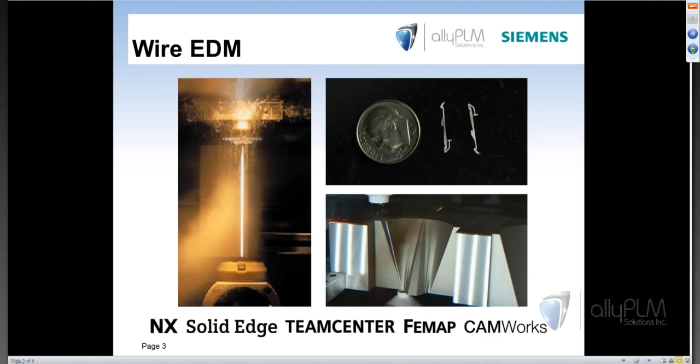So for today's agenda, we're going to look at the no-core operation, two-axis internal trim operation, two-axis external trim operation, two-axis open profile, four-axis internal trim, four-axis external trim, and four-axis open profile.

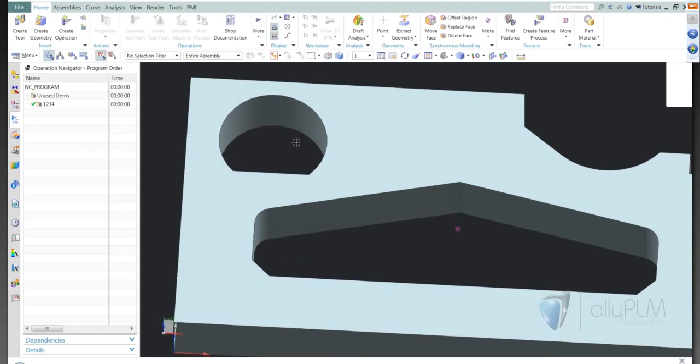Alright, to get started, the first thing we're going to look at is the no-core operation. If you don't want to leave a slug in the middle, you can use the no-core operation. It's going to basically use the wire to burn out the center of the pocket that you're trying to cut. Keep in mind this is only available in two axis. So if you're trying to do a four-axis type part, this operation is not going to be available.

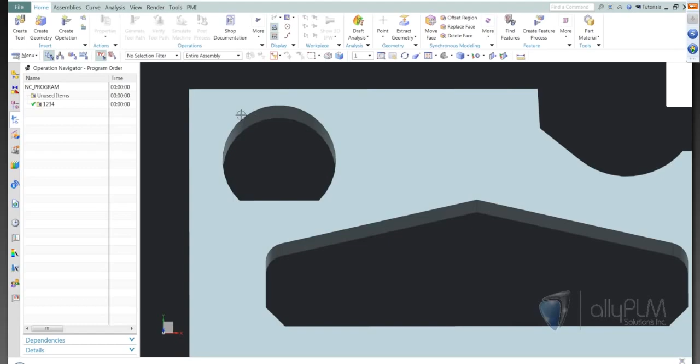So what we're going to do first is this cutout or pocket right here. And again, we're going to use the no-core operation. I'm going to first define the workpiece, and then go ahead and create an operation. Under type, I'm just going to use the wire EDM option.

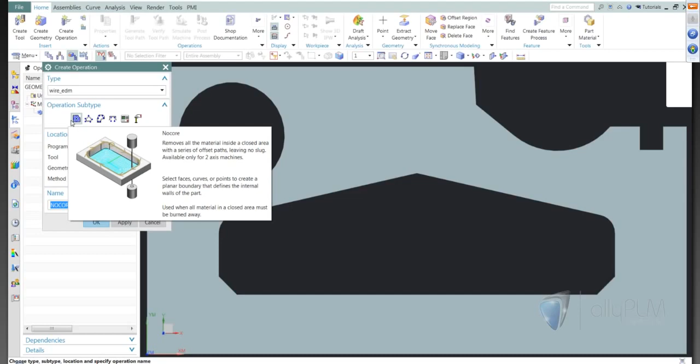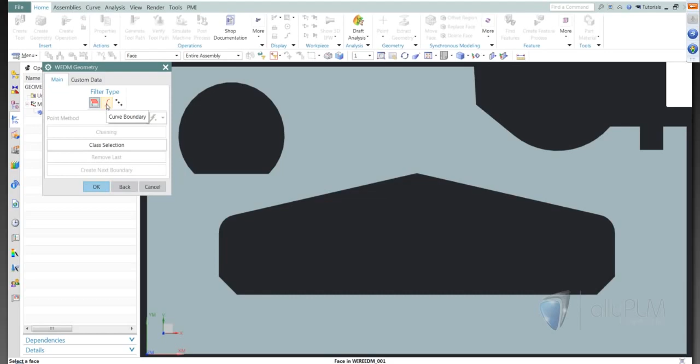So the first option that we're going to look at here is no core, and as you can see there, it removes all the material inside of a closed area with a series of offset paths, leaving no slug. Again, available two-axis only. So the first thing I'm going to do is specify the wire EDM geometry. In this case, I really only have three options for picking geometry: a face, a curve, or a point boundary. For this option, I'm going to use curve, and I'm just going to simply select the curves.

I'm going to go ahead and specify a tool. I'm going to use a 0.5 tool for the demonstration today, just so that you can see it a little bit on the screen. Alright, we're going to accept most of the defaults here and then take a look at some of the details as we go. We're going to leave the default follow periphery, and we'll go into the cutting parameters.

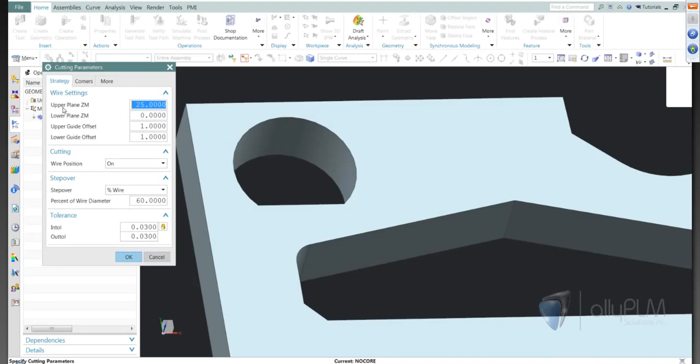Notice we have an upper and a lower plane. We need to set the upper and lower plane based on the thickness of the part. I'll go ahead and measure the thickness of this part. It is 30 millimeters, so my upper plane needs to be set at 30 millimeters. Our upper and lower guide offsets are set to a millimeter. We'll leave that, that's fine. And then we have a wire position on or tangent to. I'm going to go ahead and use tangent to.

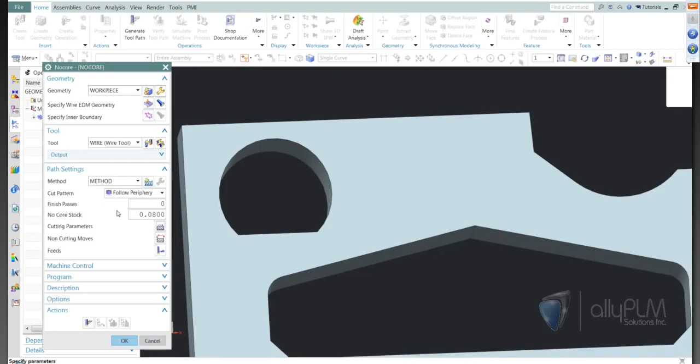Now our step over value is set to a percentage of the wire diameter, 60% of the wire diameter in this case. We'll go ahead and leave that and then accept the default tolerance settings. All right, so the first thing we need to look at is the follow periphery option. It starts in the middle and works its way out towards the outer perimeter of the feature.

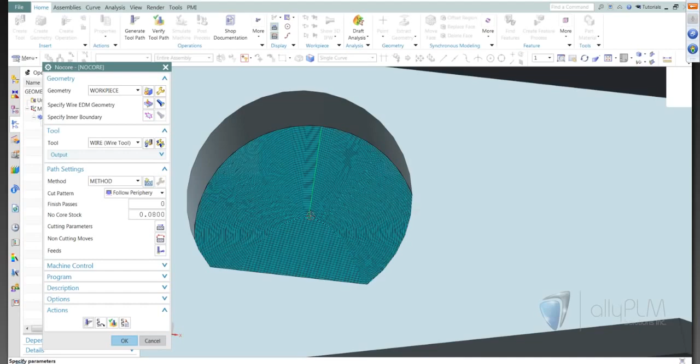Now, one thing that we didn't tell it is where the start location is. It automatically just picked a start location. What we can do is specify the start location. I can go back into the boundary, use control points, and specify our thread hole location. So I'm going to go ahead and specify that at the center and go ahead and generate. So now it is specified directly in the center of this arc.

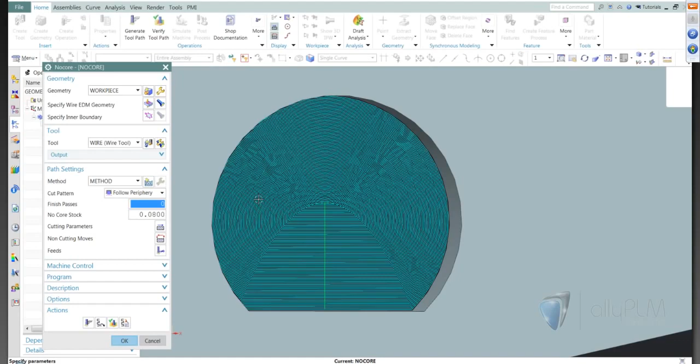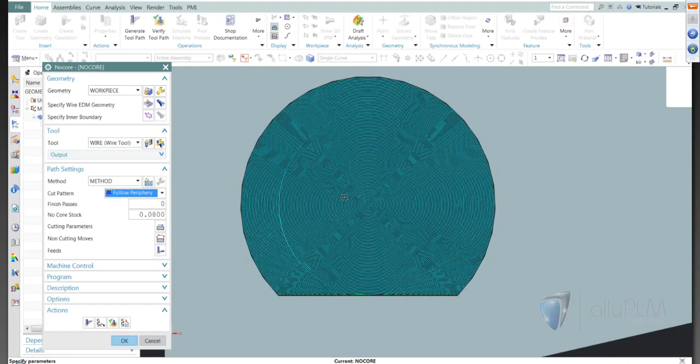The other thing that we should look at is the spiral option under cut pattern. I'm going to go ahead and change this and show you what it looks like. It starts at the center and then spirals outward. Now the only thing about this in this situation is we have these kind of jagged edges there, so that may not be desired. So you may want to use follow periphery in an example like this.

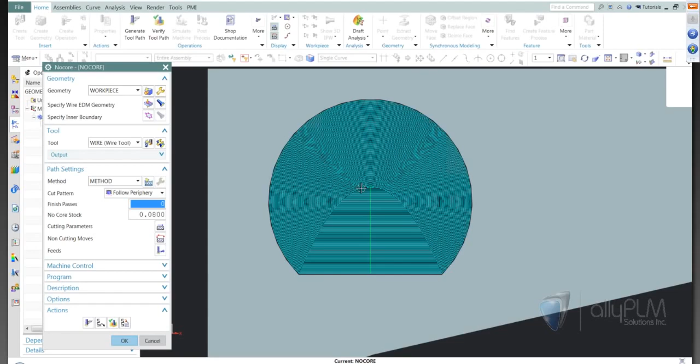And then the next thing that we can do is specify inner boundary. For example, maybe we already have a hole in here, like a starter hole. We don't want to waste all the time to cut out those little step overs with this little wire. So we can define that inner boundary. So to define the inner boundary, I'm going to actually just insert a curve, basically a circle curve.

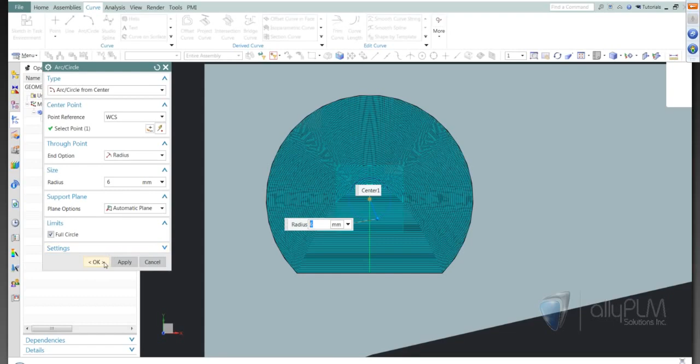So I'll just draw a curve at the center point, and give it a radius of about 6 millimeters. So now we see our curve. Now I'll just go back into the operation. And again, I can specify inner boundary, and then just simply select the circle and generate that.

Now we're still starting from the center, but we are starting from the center of the hole, and then we're removing all of that extra cutting to save you a little bit of time there. All right, the next option that we're going to look at is the internal trim. And this part is all 2-axis. You can see there's no taper or anything on this part, so everything that we're going to do on this part is 2-axis. So we're going to use the 2-axis internal trim for this pocket here.

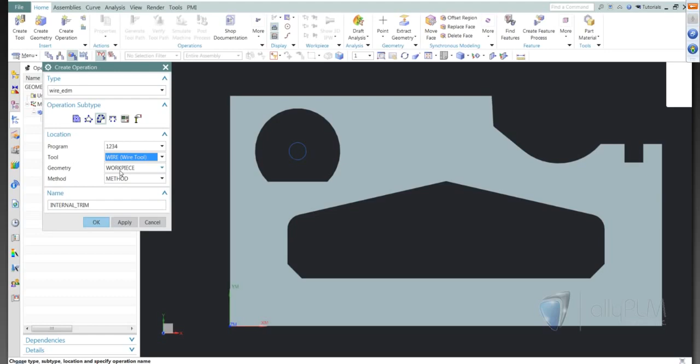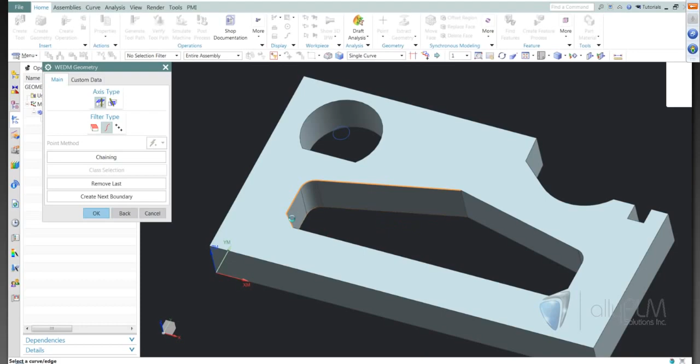Go ahead and create an operation and use internal trim. I can go ahead and use the same tool that I used on the previous operation. Now I'm going to specify wire geometry. Since we're doing 2-axis, the options for picking geometry are the same. So I'm going to go ahead and use curve. Now I can pick each of these curves individually. Wouldn't take too long in this part, but you can imagine if you have a part that's got multiple curves that you would have to pick, it may take a while. So I would suggest using chaining.

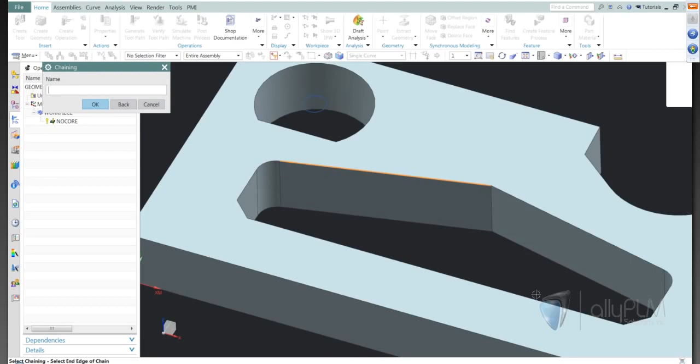So I'm going to turn on chaining, and if you haven't used chaining before, I'll go ahead and describe how this works. For chaining, it depends on which side of the edge that you pick on. For example, if I pick on this left side of the line, that's the way the chaining operation is going to go. If I were to pick on the right side, the chaining operation is going to go around this way. So I'm going to pick on the left side of the line, and then NX is going to basically follow all the way around to wherever I pick next. So I'll just simply pick here, and then it chains all the way around for me. So again, it matters on which side of the line you pick on. So that looks good.

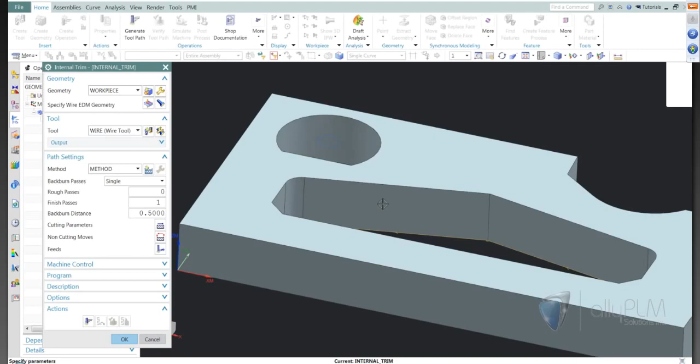Now for now, I'm going to set the rough passes to 0. We're not going to take any rough passes, and we're just going to do one finish pass on this part. We'll look at backburn distance here in just a minute. In cutting parameters, again, we need to set the upper plane, which was 30. Upper and lower guide is 1 millimeter, that's fine. We're going to do alternate directions, and actually, since we're just doing one finish pass, this won't matter. So we could either do clockwise or counterclockwise. So you can select these, especially when you're doing roughing passes, and determine which way you want your cut direction. In this case, it actually doesn't really matter.

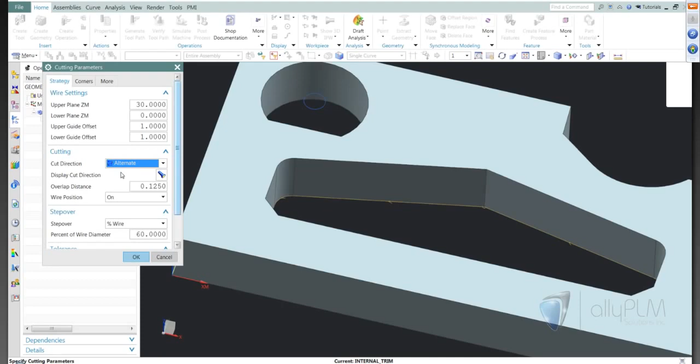So now overlap distance. When this wire cuts all the way around this outer shape, if it starts and stops in the exact same location, you have a chance of leaving like a little edge or a piece of material sticking out. So we can set an overlap distance. I'm going to go ahead and set that at about 3 millimeters, and then we'll take a look at it after this generates. We're going to do wire position tangent to, and step over shouldn't matter in this case either. We'll go ahead and generate this operation.

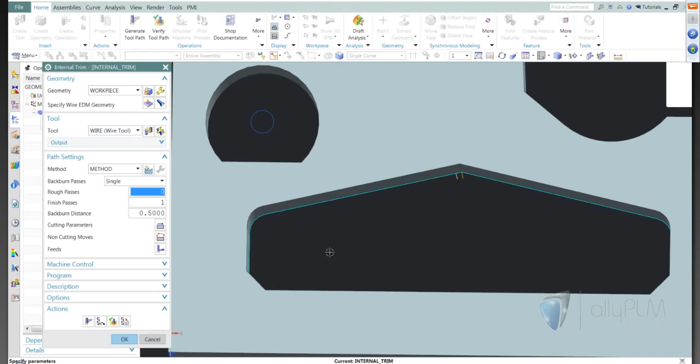Now notice NX automatically just picks the start location or the lead in and lead out points, and it happens to pick right here. That may be fine, but if you want to set it at a certain location, you can still do that as well. Notice the gap between here. One is the lead in, one is the lead out, and the gap between is the overlap distance. So we'll go ahead and take a look at this in verification. Notice it's leading in here, and then it works its way around the part.

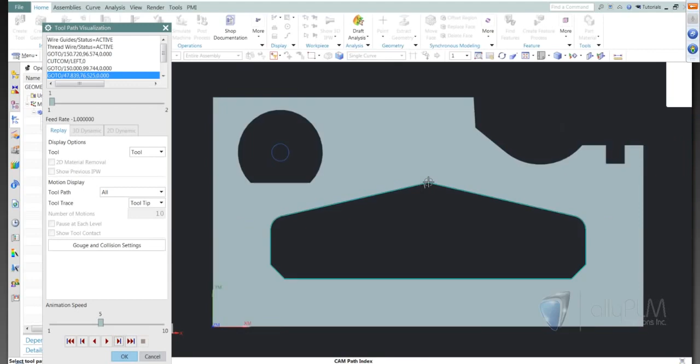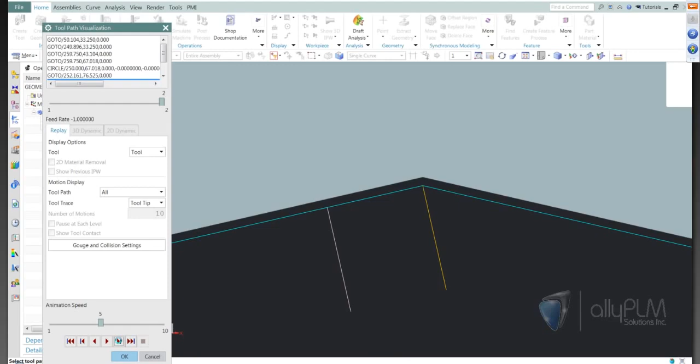Gets back to here, and again overlaps so that you don't have that extra piece of material left when you're done, and then does its lead out. So now we're going to look at doing a lead in over in this corner. So I'll go back into internal trim.

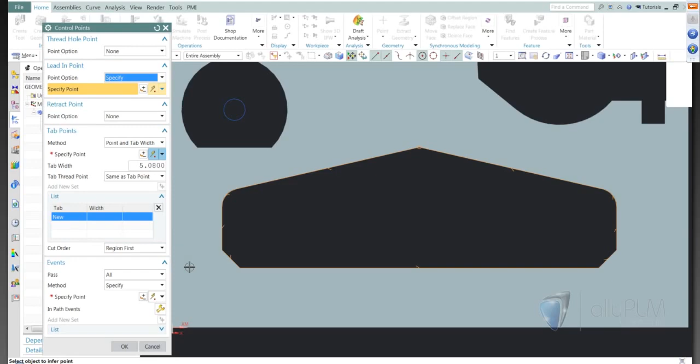To do that, I need to go back into my wire geometry and go to control points. Control points, you have a lot of options here: a thread hole point, lead in point, retract point, tab points. So what we'll do is I'll go ahead and add in just a lead in point for now. So I want my lead in point to be centered on this edge. Go ahead and accept that and generate. So now notice that my lead in is directly centered on this edge.

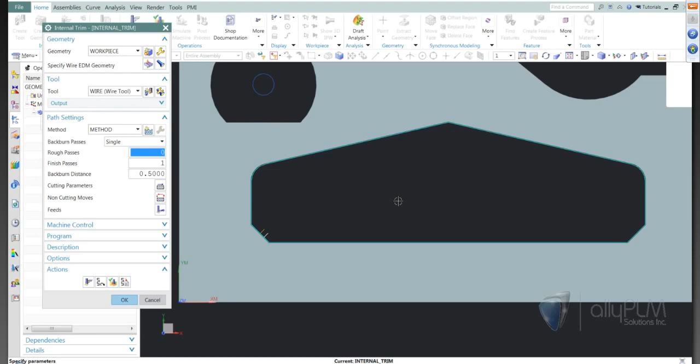Now to specify a start hole location or a thread hole location, we use the same options here in control points, and then we'll just pick a point. So I'm going to use thread hole point, point option. I'm just going to bring up the point dialog and click somewhere close in here. In a real scenario, you would have a hole there, and you'd know the position of that.

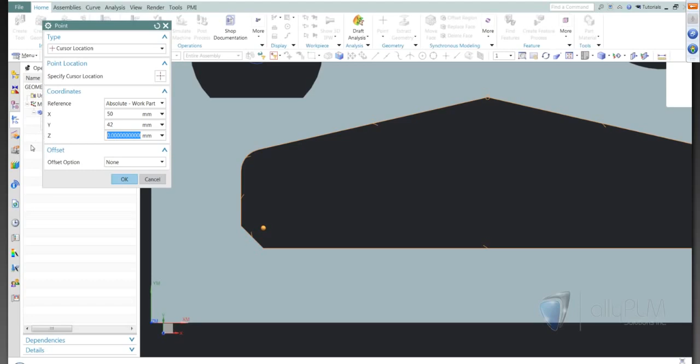So for this example, I'm just going to go ahead and use 50 in X and 42 in Y. And we're going to assume that that block has a hole there for our wire thread location. All right, we'll generate that. So notice it comes from here over to the lead in and then starts the wire cut operation.

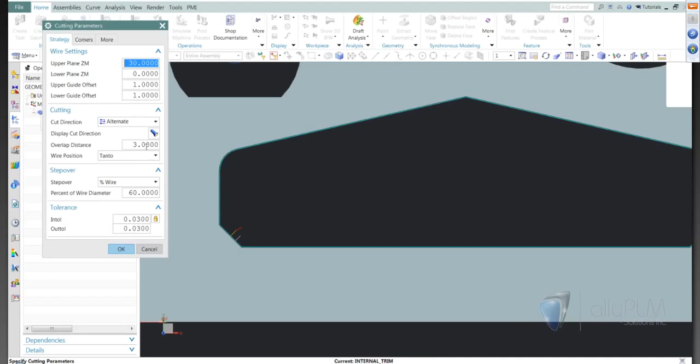I'm going to go back into cutting parameters and change this overlap distance to 0. And why I did that is so that we can see what this backburn distance does. So for example, maybe I want multiple roughing passes on this part, and I want to leave a little tab here basically to hold this slug in place. So if I do multiple rough operations, I'm going to go ahead and put 3 in here.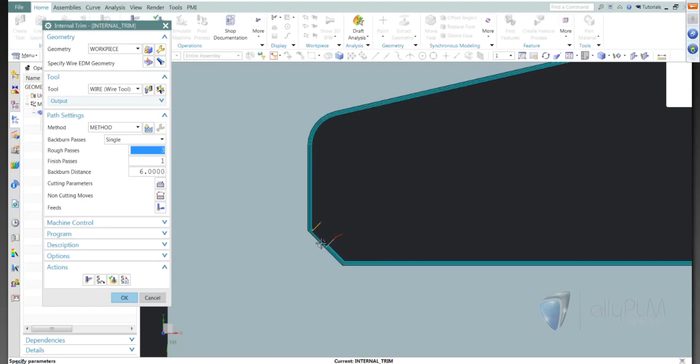My backburn distance is the length of tab that it's going to leave. So I'm going to go ahead and use a millimeter just so we can kind of see it, and then I'm going to change that to a bigger amount, let's say 6 millimeters. So now you can see that it's leaving a tab. So it does its rough cuts, leaving this tab connected, and then when it goes to do the finish cuts, it cuts this tab off.

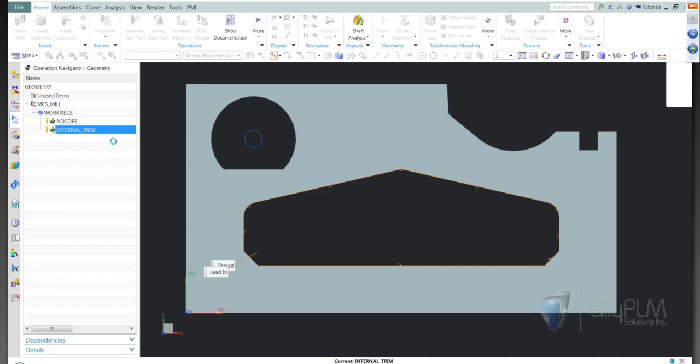We can also add in multiple tab locations. For example, we can have a tab here, and then maybe a tab over here on the right side. We do that by going into control points again and adding in a tab point. The method we're going to use is a point and a tab width. So I'm going to specify a point. I'm going to go ahead and just select the center of this edge. And then the tab width, just to make it match the other side, I'll do 6 millimeters.

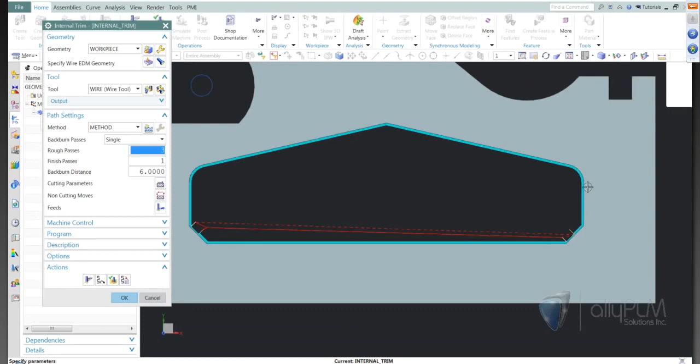And we'll generate that. So now notice we have basically a gap or a tab here on the left side, and then also a tab here on the right side. So again, that's just a way to hold the part in place until the finish cut.

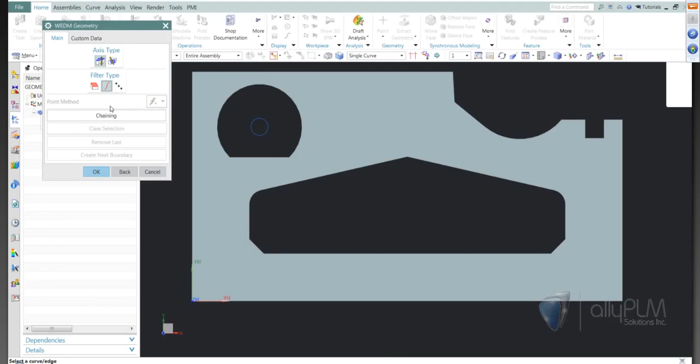All right, so now let's take a look at external trim. We're going to first cut all the way around the outside of this part. Again, this is a 2-axis part, so we use the 2-axis external trim operation. We use the same tool, and we'll go ahead and specify our geometry. Nothing really different here on specifying geometry. I'm going to use chain again, and I'm going to pick the left side of that edge, and NX will chain all the way around there for me.

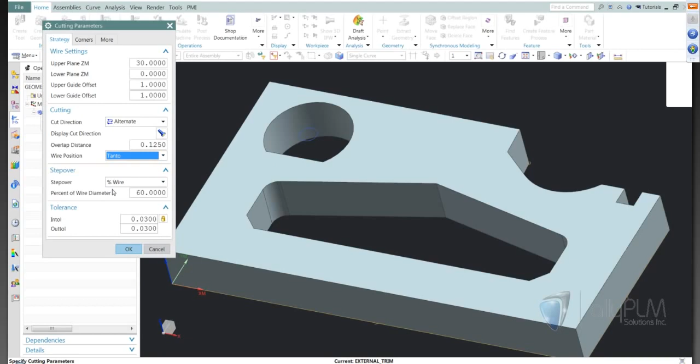And like we did before, I'm going to go ahead and just specify 0 rough passes and 1 finish pass. And we'll need to input this upper plane again. And we'll go ahead and generate. So again, NX automatically picks the lead in and lead out location.

So if we want that to be in a different location, we can do the same thing. It works the same way as internal trim by going to control points and then specifying a lead in point. So maybe we want the lead in over here on this edge, and we'll go ahead and generate that.

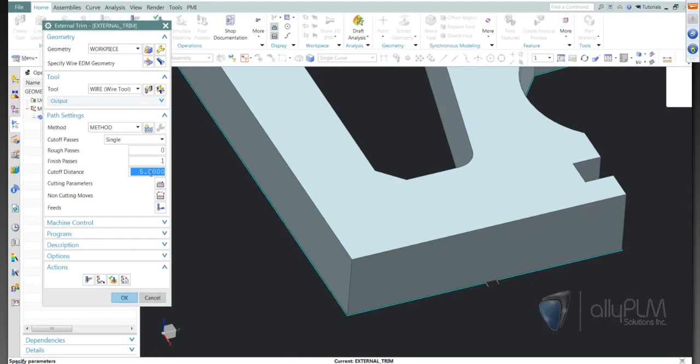Now this also leaves a tab. The default was 5 millimeters. So if we needed to leave an extra amount there, we could type in whatever distance, and it will change that value. If we don't want anything, we can do just 0 here.

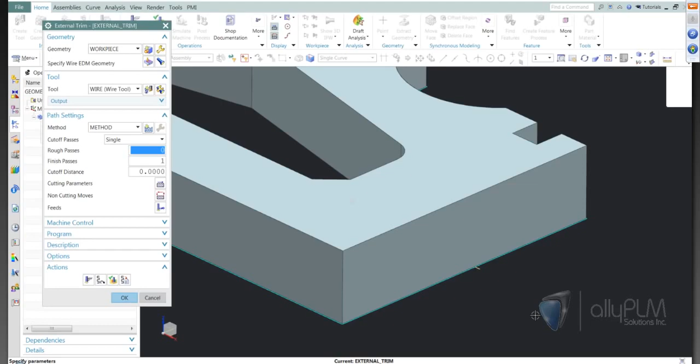There are also a couple other options in non-cutting moves for our engage type. We can select lead in. Notice it's set to direct. We can specify an angular lead in. For example, maybe we want this to come in at a 45-degree angle. So now we're leading in and leading out on a 45-degree angle. The lead out is set to the same as lead in.

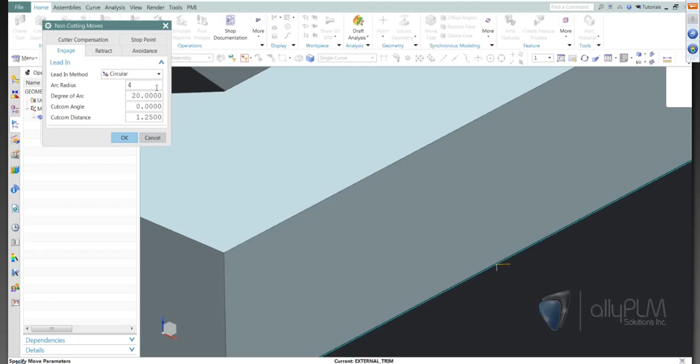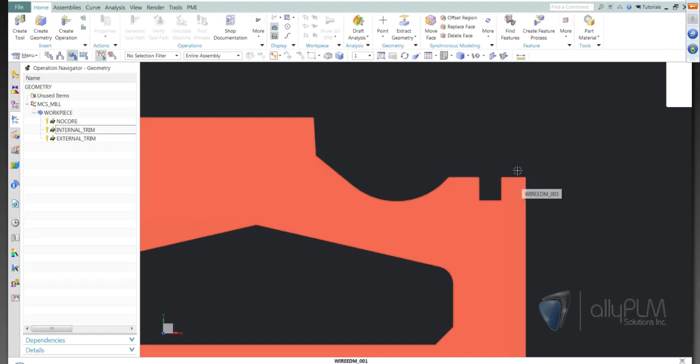And then we also have an option for a circular lead in as well. So we'll do an arc radius of, let's say, 4 millimeters. So now we have an arc coming in. All right, now we'll take a look at the open profile option. So for example, maybe the outside of this block is already cut, and all we need to do is do this cutout shape here. We'll use the open profile for that.

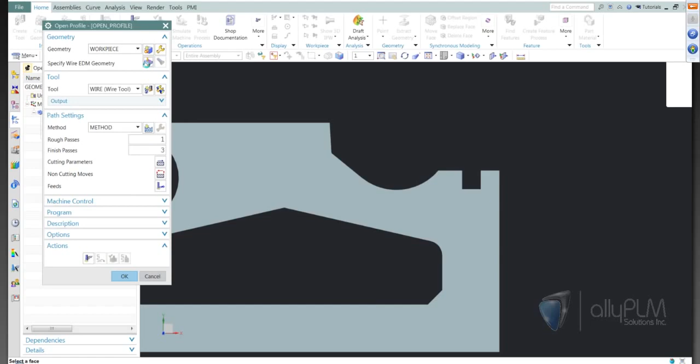So I'll create an operation, open profile, and we'll go ahead and select our geometry. This is 2-axis as well. And I'll use chaining again. So I'll pick the right side of this edge, and I want it to finish up over here. Okay, so the start and then the finish. And I'll leave rough passes and finish passes at the default.

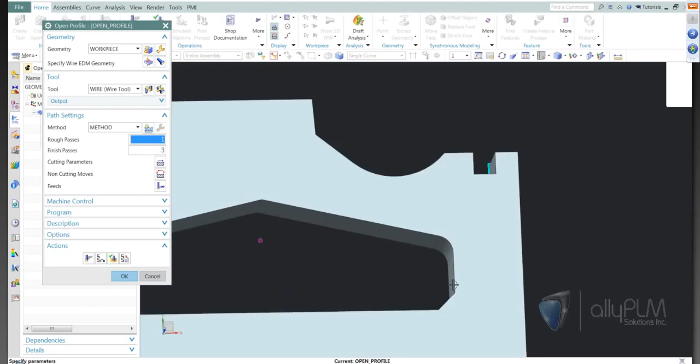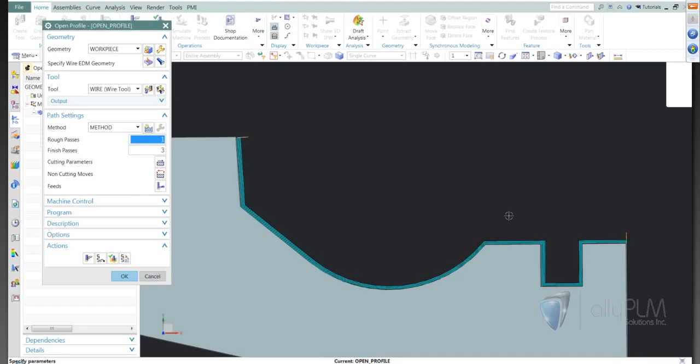And there we see the operation. So we see it is doing 1 rough pass and then 3 finish passes. So the only difference between open profile and external trim is the fact that this profile is an open profile instead of a closed. It's not completely closed. And then we have the same options available that we did in external and internal trim as far as lead ins, lead outs, things like that.

Okay, so now we'll close this part out, and we'll take a look at another part that is going to require 4-axis. As you can see in this part here, all of the walls on this internal profile have taper. So this is going to require 4-axis wire EDM. So I'll go ahead and specify the part, and get started creating the operation. This is going to be an internal trim operation.

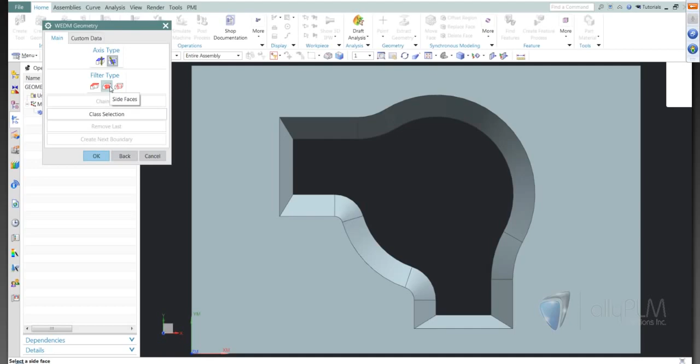And I'm going to need to specify the wire geometry. Notice I have a toggle back and forth between 2-axis and 4-axis. I'm going to need to select 4-axis. A couple options that we have here: we have a top face option and then a wireframe option for geometry selection. I'm going to use side faces. So now all I have to do is select these faces. I can select these faces individually.

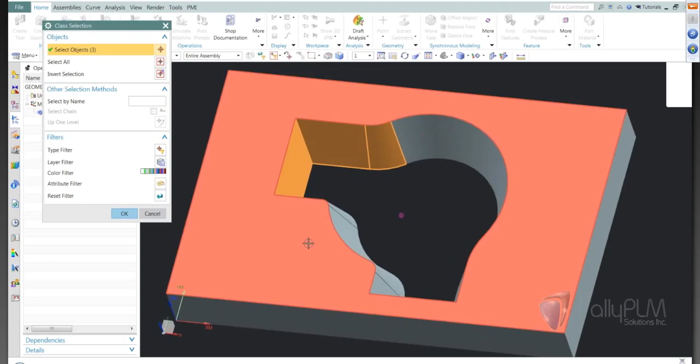However, if you have a lot of faces to select, you may not want to select those individually. So if you want to use a window selection, you can go into class selection, and then you have some other options, filter options and things like that as well. So now I'm able to use the window selection. Okay. And now I'm going to specify the tool. Again, I'm just going to use a 0.5 millimeter. And we'll set our roughing to 0 and just do one finish pass for now.

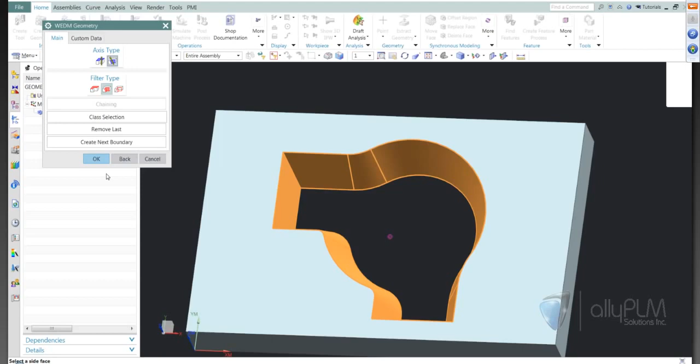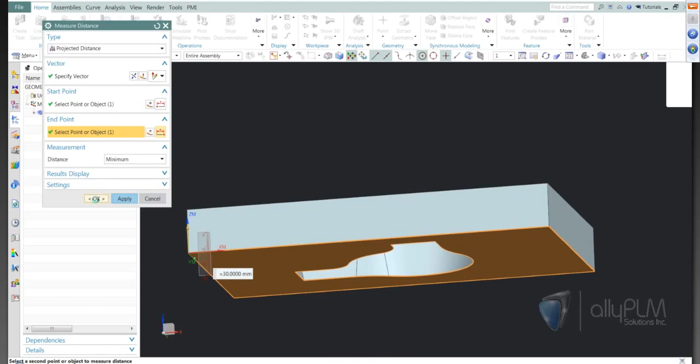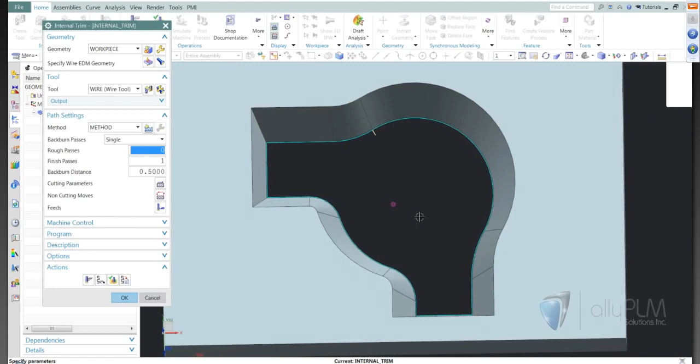And we need to specify the height again. I'll check this part as well. I think it's 30 millimeters as well. Yes. So we'll input 30. All right, all that looks good. Okay, so let's take a look at 4-axis internal trim. We'll generate this. Again, it automatically picks a start location. So we'll go into verify. Take a look. So notice that the tool is along the angle of the pocket.

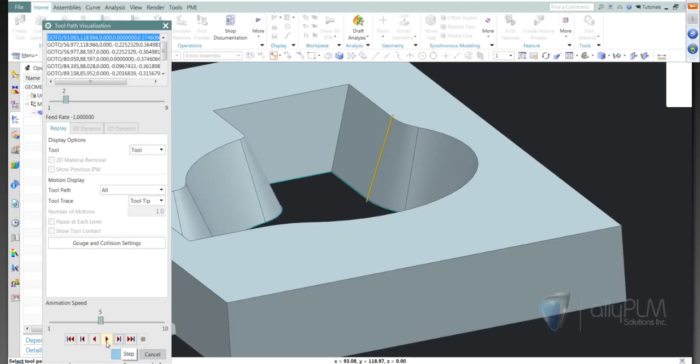Okay, so now, the same way that we did on 2-axis, we can do the same thing in 4-axis. We'll specify some control points. Let's do a threaded hole. Maybe our threaded hole is down here at this location. We'll do 150 and 30. And then we'll do our lead-in point centered on that edge.

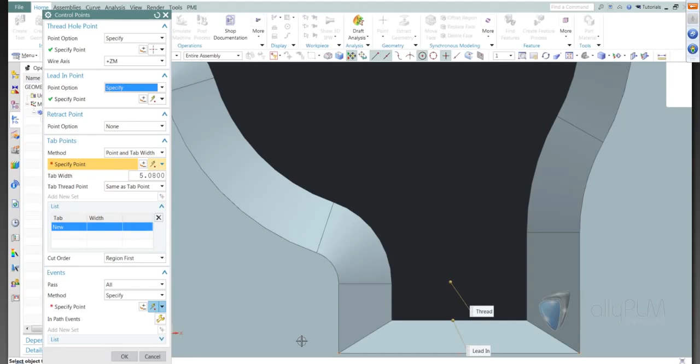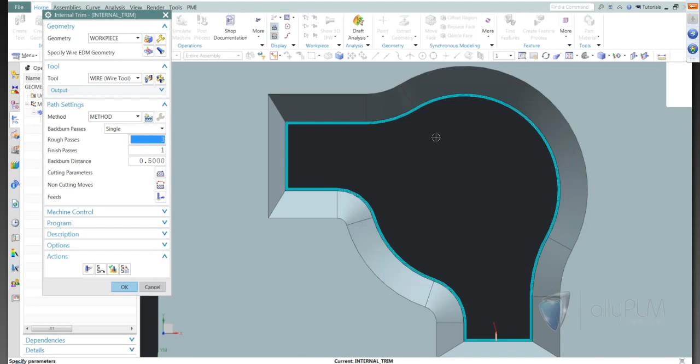And we'll turn on our roughing passes. Let's do 3 roughing passes. And we'll generate that. So again, now you see the roughing passes and then that final finish pass. Now we have our threaded hole location and then our lead-in location. Again, this works basically the same way as the 2-axis operations. All right, so let's take a look at a part that's going to require a 4-axis external operation.

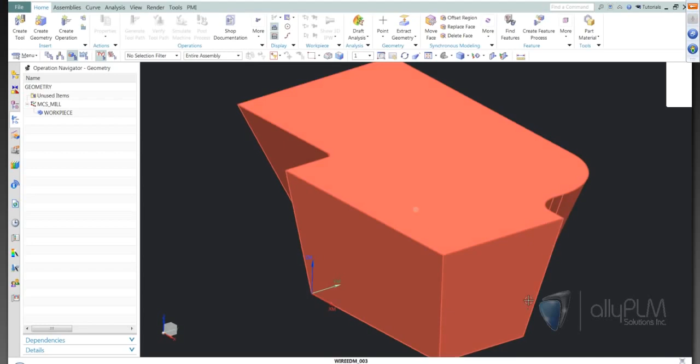All right, as you can see here, this part has tapered faces as well. Some are straight, some are tapered. So these here are straight, and then the rest have a taper shape.

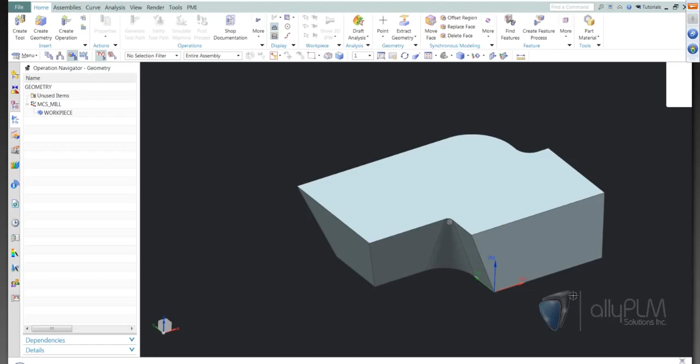So I'm going to specify the part, and I'll go ahead and create an operation. This is going to be external trim.

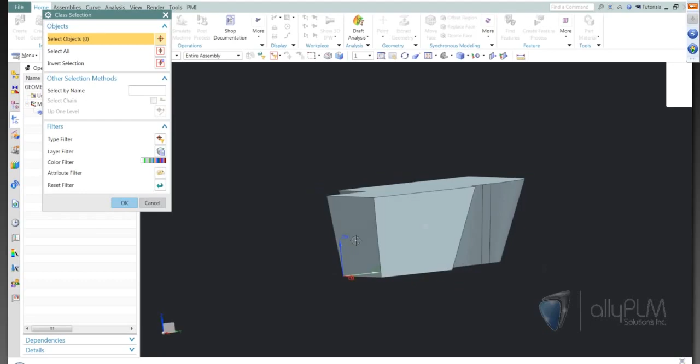Now for specifying geometry on this, again I'm going to use 4-axis and then use side faces. I'm going to go into class selection. Now I can pick these individually, or I could probably try to do a window selection as well, but what I want to show you is notice I have multiple faces around the outside of here, so it may take you a while to pick those.

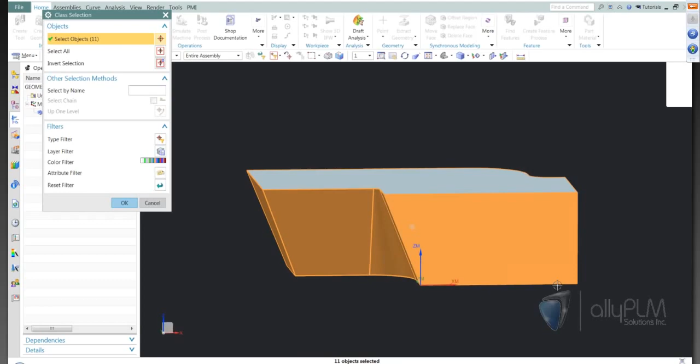A little shortcut would be to pick just the top and the bottom, and then actually just use invert selection. So that will invert the selection, so instead of picking the top and the bottom, it will select everything else for you. So a little shortcut there that may save you a little bit of time.

So now we've picked our faces around the outside of the part. Specify the tool, and we'll go ahead and leave roughing passes set to the default. In cutting parameters, again, I need to specify the height of the part.

So this part is 20 millimeters tall. We're going to go ahead and leave the defaults here, except for change this to tangent 2, and go ahead and generate this. Now notice we have a cutoff distance here.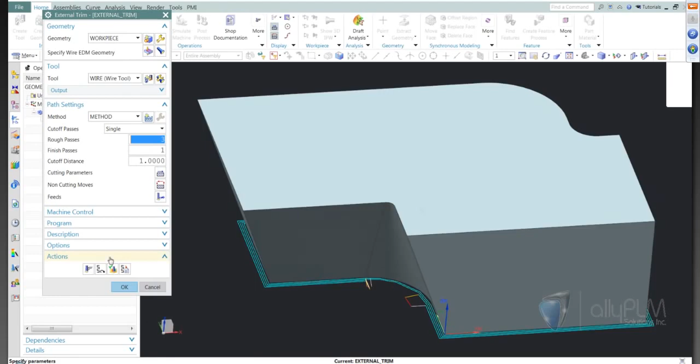And we'll go ahead and verify this. Okay, so that looks good.

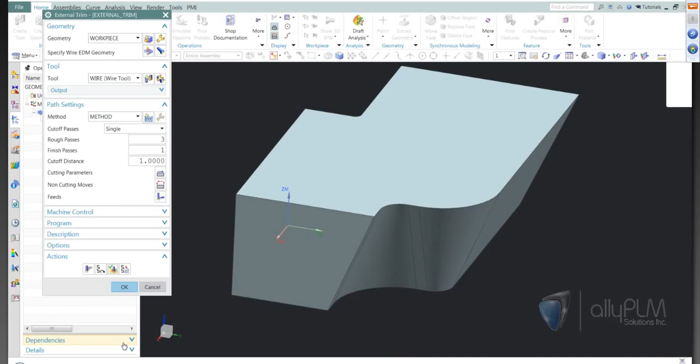So as you can see, the external trim with 4 axes basically works the same way as internal. You have the same type of settings that we looked at for internal trim. Now let's take a look at one other part that I have here.

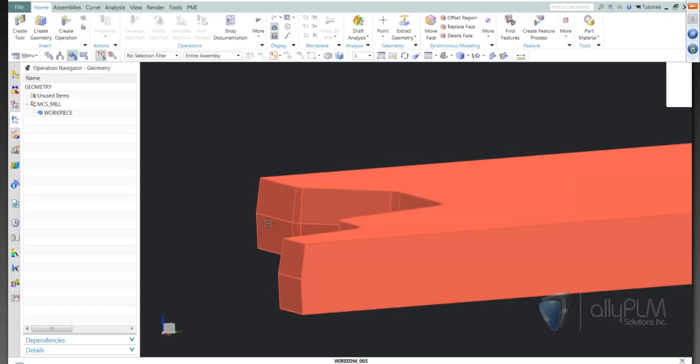Okay, what you'll notice on this part is it has basically a straight face here. This is vertical, and then we have tapered faces here. So in order to cut this, we can actually just use 2 different type of operations. We can cut the straight face and then the angled face as well.

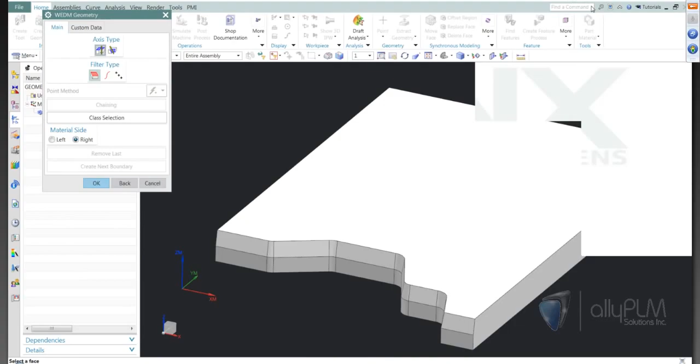Go ahead and define my workpiece, and go ahead and create an operation. This is going to be an open profile. And I'll go ahead and use the 2-axis option for now.

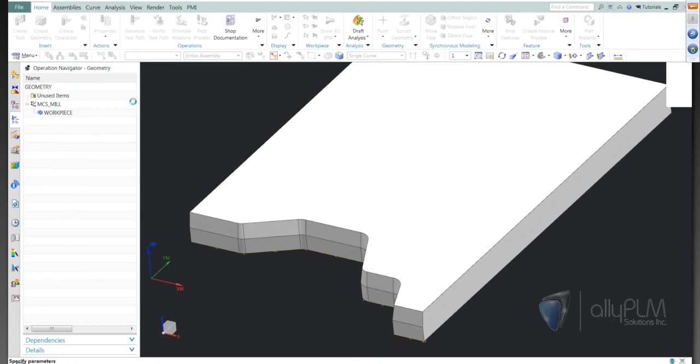I'm going to use the curve option and then chaining, and I'll go from the right side over to the left. And I'll go ahead and use the same diameter wire that I've been using.

All right, and we also need to set that upper limit. So I'll go ahead and measure this part in the Z direction from top to bottom, and that is 10.16.

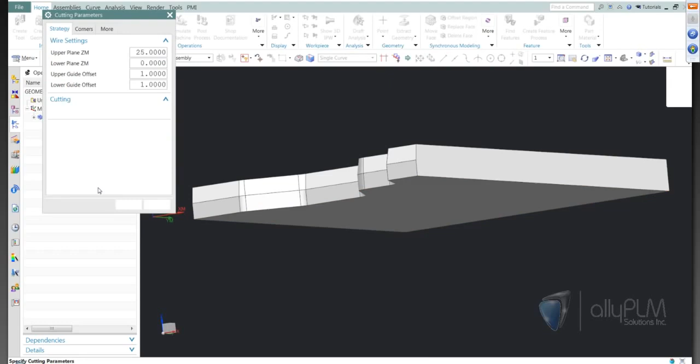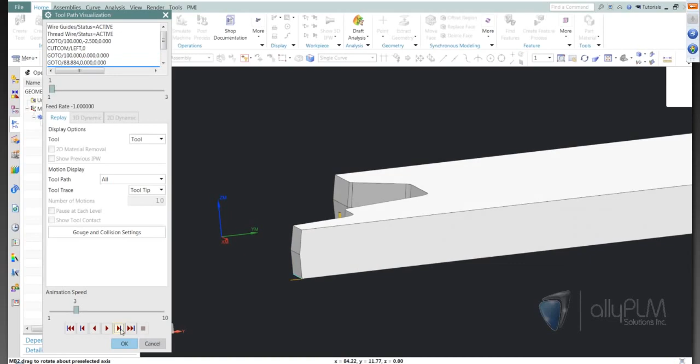And I'm not going to do any rough passes. I'm just going to do one finish pass here. And in verification, you can see that the wire stays straight or vertical and just cuts that straight edge or vertical edge.

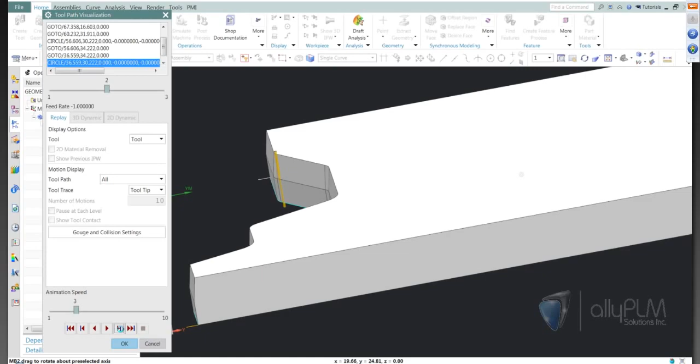So then the next thing that we can do is we can actually use 4-axis and then go along this tapered edge. So I'm going to do open profile again, use the same tool. Now when I go into my geometry selection, I'm going to use 4-axis, and then I'm going to go ahead and pick the faces that we need to cut.

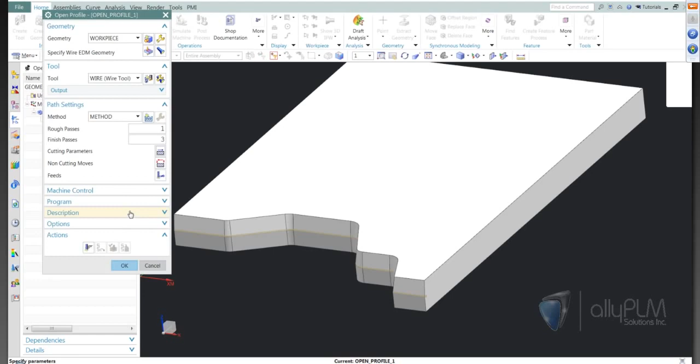That looks good. Now in cutting parameters, I need to set that value again, 10.16. I'm going to use tangent to on my wire position, and just do one finished pass.

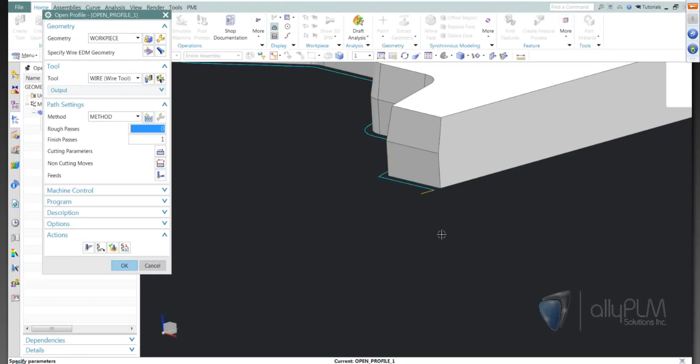So notice what it does is it projects this angle face down to the Z0 level, down to that lower guide. So we can see that in verification here. So notice the wire is along this angle. So even if you don't have a full, complete tapered surface, you could still achieve the cutting conditions that you need to cut a 4-axis tapered shape like this.

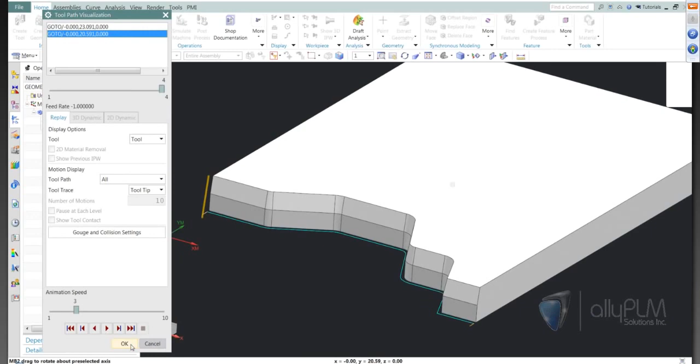Well, that's all the time that we have for this session of Lunch Bites. I hope today's session was informative for those of you that haven't done wire EDM programming before, and I hope for those of you that have done wire EDM programming, maybe you were able to pick up on some shortcuts or tips along the way.